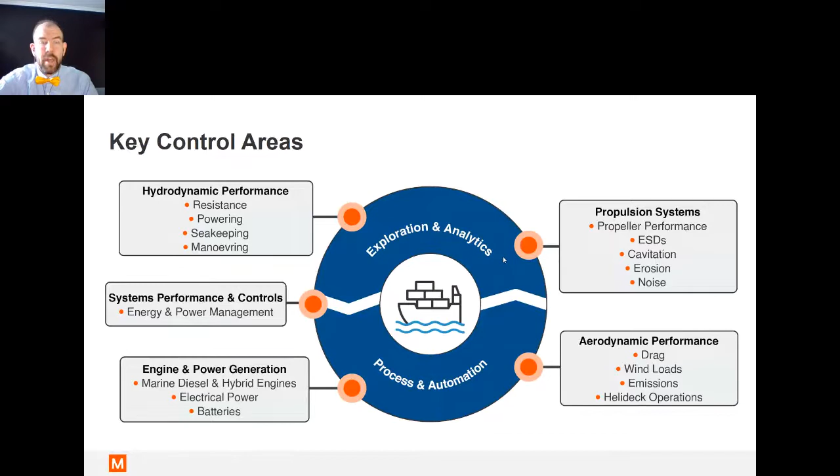So really the idea for us is to be able to collect data from each of these aspects, but also to be able to predict the behavior of your components, assets or systems in order to optimize each and every one of these little aspects and KPIs that you're looking at and that you can control over time. So how do you do this? At Maya, we've been doing simulation for the past 40 years, as I said. Those simulations can be translated into many different aspects.

If I go around the clock here, from the start we have thermal simulations, fluid dynamics, which can be key here. We'll talk about it in a second as well. Structural simulation, to make sure all your assets are going to be able to withstand the harsh environment they're going to go through. But if we keep going, there are more and more things that can be simulated.

I won't go into a deep dive on each of those technologies, but the idea is to say that you can use today's engineering capabilities to predict the behavior of a given system or a component of a system, and being able to predict how this system will behave can help you optimize. Then you can start going into what we call those what-if scenarios. You can start testing: what if I go faster? What if I go slower? What's going to be the impact if I change the angle of the hull? And all of these things.

And really that's the intent of the first piece of a digital twin for me: to gather predicted data and compare it to the live data that we're able to measure on the stream. So what does that mean, simulations in the marine industry? How can that be leveraged, and how can you take advantage of those capabilities on the engineering side?

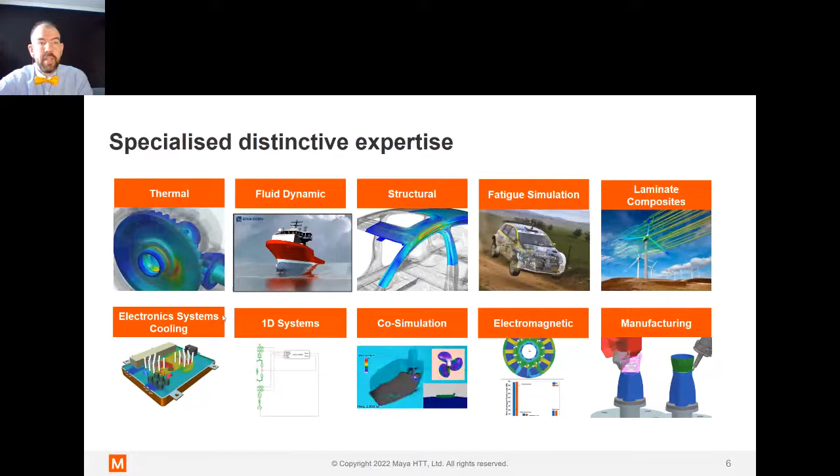First of all, I'll give you an example from a company that really helped their ship design by leveraging all these simulation capabilities. We're talking about a 36% hull efficiency increase. That's nothing compared to a lot of capabilities that you have to augment your profit. But in fact, the hull efficiency design helped them save $3 million a year per ship. That translates into real hard dollars for your company, but only if you are able to modify the future hull design of your ships.

Let's say you have existing ships, and you're already experiencing their efficiency today. What can you do? That's another aspect where the digital twin can help. The real question is, how can you leverage your legacy data and systems to increase today's profit? That's a key question we encounter a lot, because we see that simulation can help drive new savings, like I just explained. But in reality, you can't modify an existing boat. You can't change an existing system. So how can you take advantage of what you have today and do more with it?

So that's really where the digital twin, again, comes into play. This can go into many aspects, but I'll try to put some lights on dark corners of this topic. So we see the digital twin as really something that can take place in three different typical aspects.

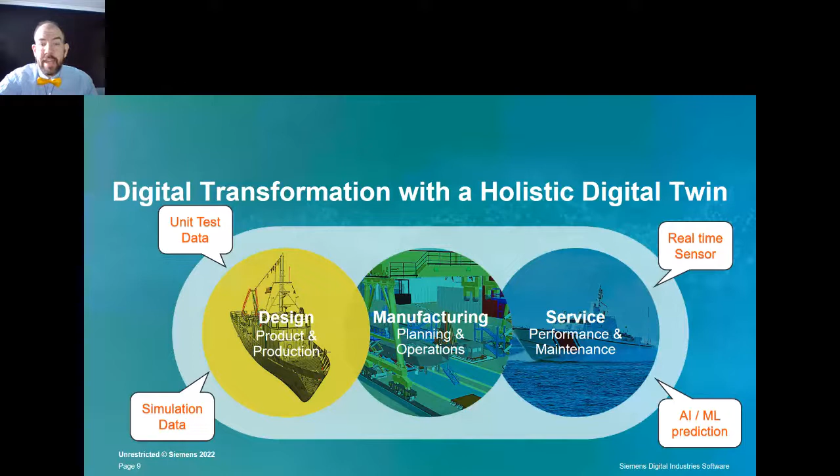Again, the same type of data would apply for the manufacturing portion. So you'll do some quality testing, you'll have some manufacturing process. And again, you can compare what you've planned with what you're actually getting in real life and see if your initial model is good. You can start correcting that model so that next time, when you're going for another boat or another trip or another plan, you have better data. So that's what we call really the digital twin: we compare the real-time data to the predicted data and are able to learn on both sides.

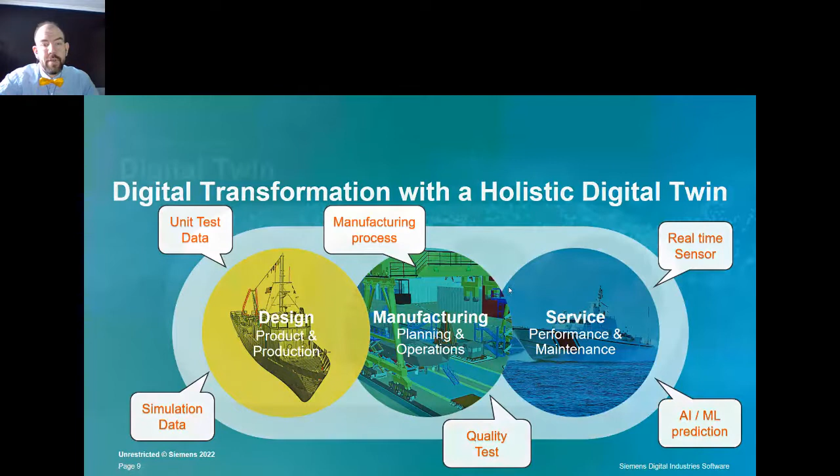But as you've seen right now, there are different, let's say, combinations of those real-time to predicted data that we can do. So we work a lot with Siemens in that portfolio, and we call it the holistic digital twin. So if I try to put an image on this, we have those different aspects, the product design, the production planning, all of these aspects I've just described.

The idea is that you can do a digital twin for each of these individual aspects, but the key here resides in being able to connect data from your product design to your production. So if there's a shape on your boat that changes, you want your production planning to be addressing those changes. The same happens if there's a production change from the initial design. You want to make sure that the product data collection actually takes into account those changes that were made in production. So really, the key here is the ease of transferring data from one digital twin to another to really make sure we have a holistic view.

So really, if we're able to get the insight from the actual performance back to the product design, if we know how our boats are behaving today with the collected data, then we're able to inform our design, our future engineering designs, how we can make better improvements and how we can leverage this holistic closed loop digital twin, which is really what we're talking about today.

If I keep going on that route of what you can do, I want to make sure I show you also examples. So there are people that are already leveraging such capabilities. CSL is a company we've been working with at Maya, deploying real-time data collection on their fleet. That fleet has been worldwide. So really the challenges were, first of all, track the data on the boat. Secondly, bring the data back to onshore data centers or servers so that data can be analyzed. And then there's also the challenge of pushing back some data to the boats with the informed KPIs or decisions that are being made onshore.

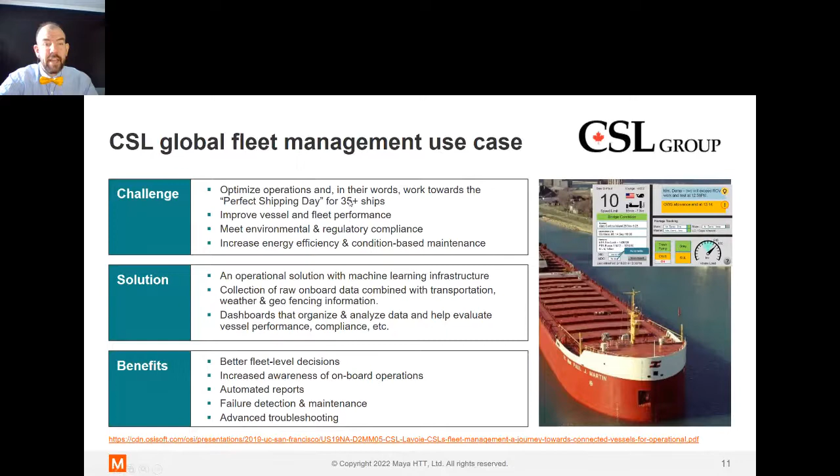So if we keep going, a few things that can help you get to that Shipyard 4.0 that we're talking about: making sure you have the decision confidence you're looking for within the model. Again, those models can be based on past historical data that you analyze and learn from, can be based on simulation engineering data where you're trying to predict the future based on the input parameters you have, or the combination of both, which I believe is the holy grail of those models being created.

Then down the road, you want to be able to explore some possibilities. So not only do you want to be able to see the model, but also input some new things. What if this boat would go faster? Would it save on gas? Would it actually emit less or more emissions at this point? The question is always, if I double the number of boats, will I be twice as fast? Sometimes yes, sometimes no, depends on your reality.

You want to go faster, meaning you want a model that runs really quick. You want some things that run within the milliseconds space today for some applications, and some others could be a longer analysis time, and it would be okay as well. And in order to make better decisions, you want to make sure you're able to connect all of those data together.

Another idea where we've seen people leveraging the digital twin: if you have enough data and enough engineering prediction on how the boat will behave, you can even go down the path of training your own crew before the actual boat exists, making sure that they practice their maneuvering and their seakeeping operations to really make sure that whenever the boat comes on, that learning curve has been dealt with already. Just throwing out ideas on a different field right here. Where are we coming from with all these digital twin ideas? We're not reinventing the wheel.

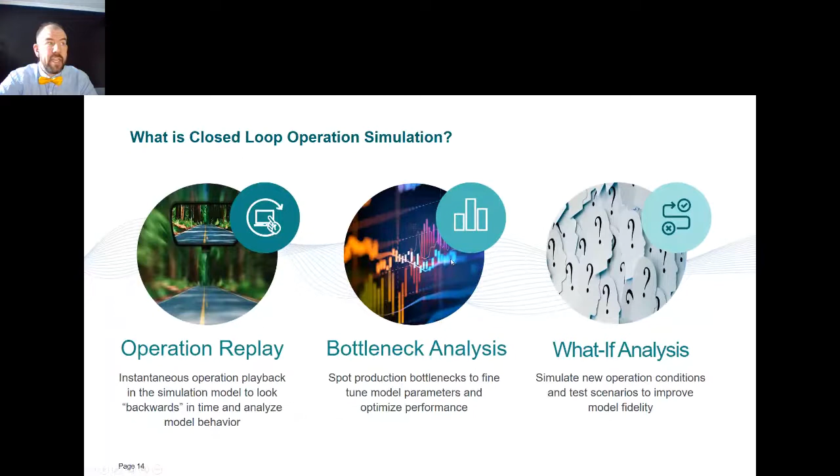I wanted to put into an image what we're actually doing with the digital twin, combining the physical world and the digital world. That's an example from the manufacturing area: first you start collecting data, then you store that data so you can build a historian approach. You want to transfer that data to analysis to do production replay and understand what happened. Same for you if you can do it with a ship.

If you could see the path of a boat, or how much wind load was applied to it, you could learn so much and then define: is this a bottleneck? Why is my boat not getting in on time? Why is my boat getting too much emission? These are the types of things you want to look into.

So you do the analysis, start to vary some parameters, try to see what if I do this, what if I do that. What are the parameters I can play with? Start to simulate some components, evaluate those simulations to make sure they're relevant and accurate, then do what-if analysis to find the optimal combination of parameters you can act on, and make the adjustment in your physical world.

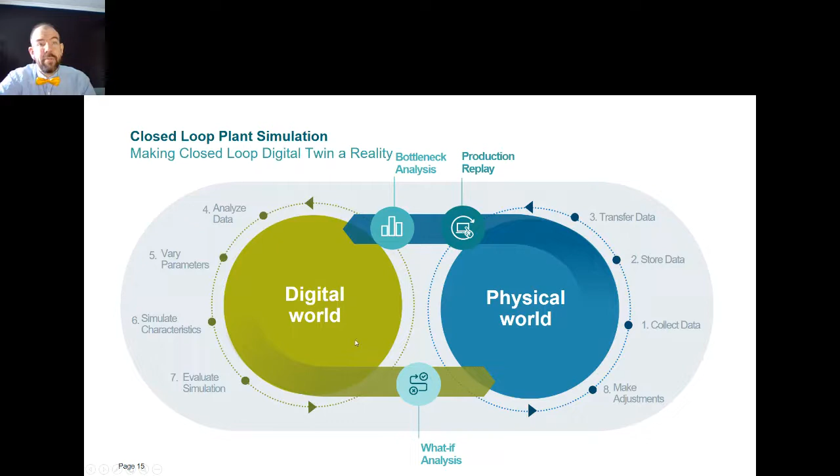So that's really the optimization loop we're looking at. Again, I want to give you some examples from other industries.

This is a dairy plant that was looking to improve their tank size. Leveraging our technology, we did multiple iterations of what-if scenarios using their actual models, and found we could increase the throughput from 2 to 16%, and decrease the volume of their tank from 8 to 27%. Reducing the plant or tank size was relevant and important for that industry.

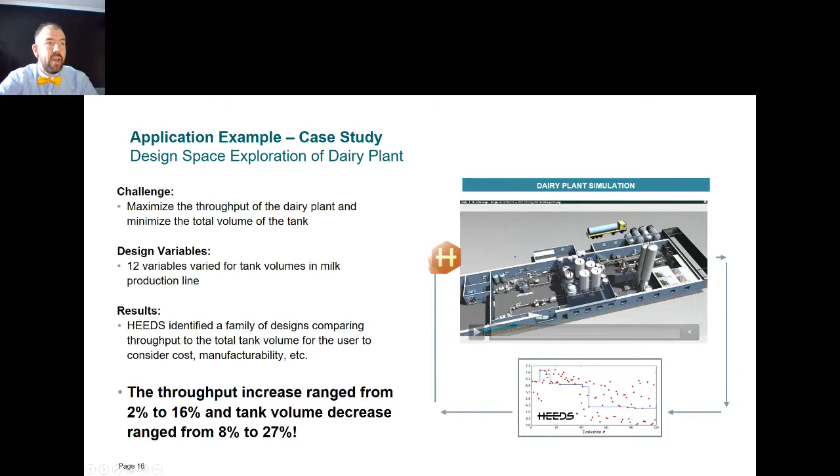That's where we focused on these objectives. For you, we could focus on other objectives. I want to keep going as well, giving you a more mechanical example.

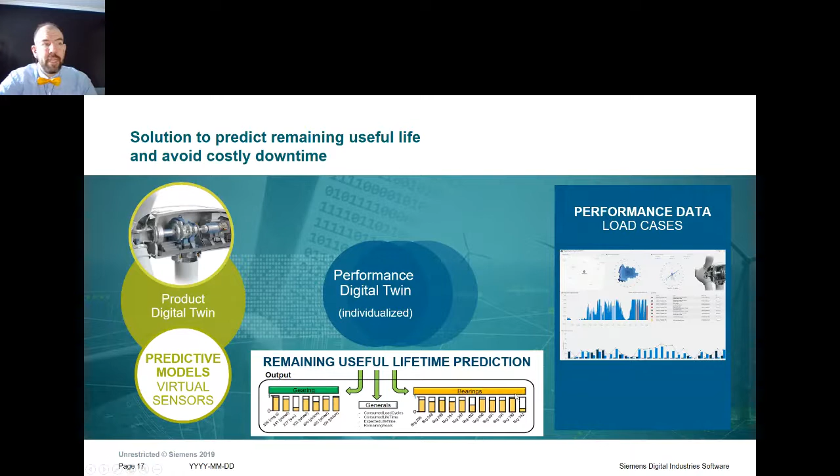We had wind farms using the same approach, doing the digital twin of the product and the performance, comparing how the product is behaving compared to what it was supposed to, and leveraging those simulations and real-time data to identify the remaining useful lifetime of the gearing or bearings within those wind farms. Ideally, you want the same approach on your boats, being able to predict how the bearings of your engines or other key components or systems are behaving and what the maintenance should be.

In conclusion, I want you to identify the digital twin as a comprehensive one, not just one system, but being able to oversee your whole fleet. Personalizable and adaptable are going to be key components for you, and being flexible. As I said, iTech today is not iTech tomorrow, so make sure whatever you pick today will be flexible for your tomorrow's needs.